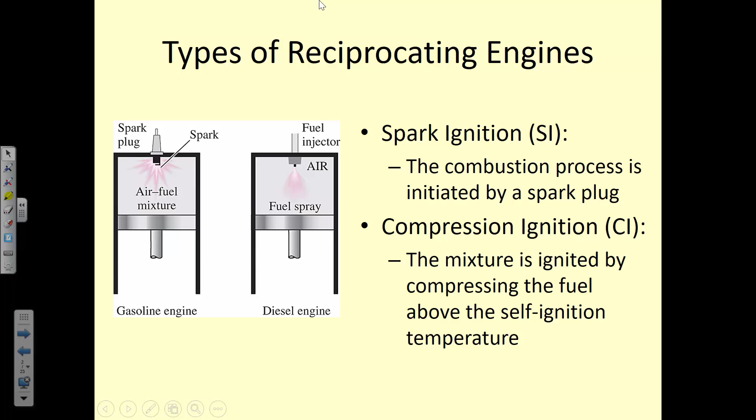So internal combustion engines - that's the primary methodology of work output, and there are 2 different ways it's delivered. There are actually many different ones in between, and we'll talk about that later in the lesson, but if we're categorizing them, it's spark ignition and compression ignition.

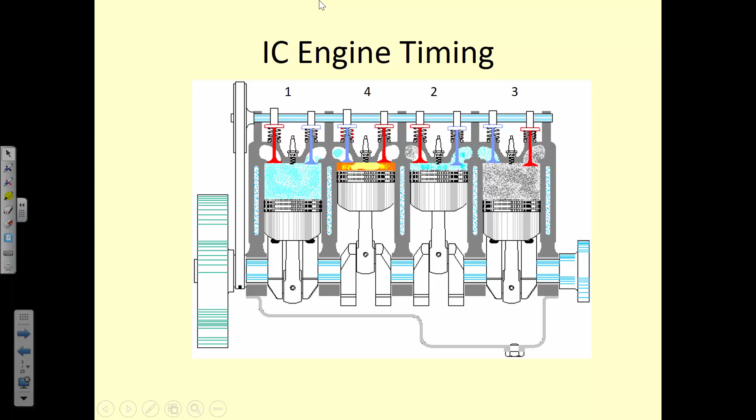So the diesel cycle is very similar to the Otto cycle or the gas cycle in that it consists of 4 strokes. We have a compression stroke where air in our cylinder is compressed. Then there's the power stroke where the fuel's injected and it self-ignites and forces that piston down, so that's what gives us our power output. The exhaust stroke where the piston moves back up and these byproducts of combustion are exhausted, and the intake stroke where it moves down and it intakes fresh air again, and then the process repeats all over again.

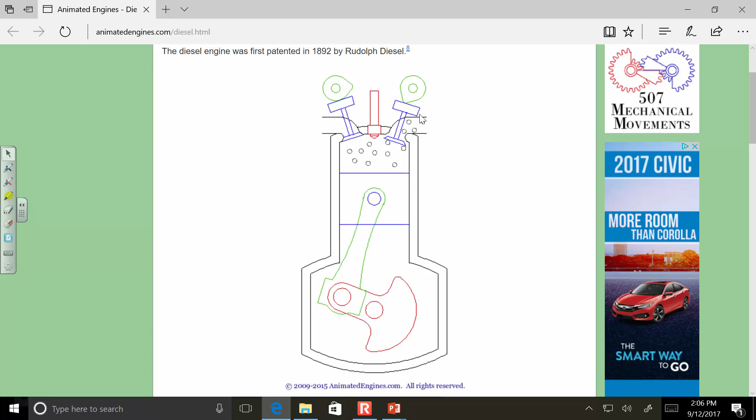So we can look at it in another view in this software, and I like it because I can slow it down so we can see each of these strokes as they are. So that's exhaust, we have intake, compression, and then it sprays the fuel in there, it self-ignites, forces the piston down, and then we exhaust the byproducts again. So the process is very similar to that of the gas engine, but you'll see as we look at the property diagrams that it's actually a slightly different process as it's drawn on the PV diagram.

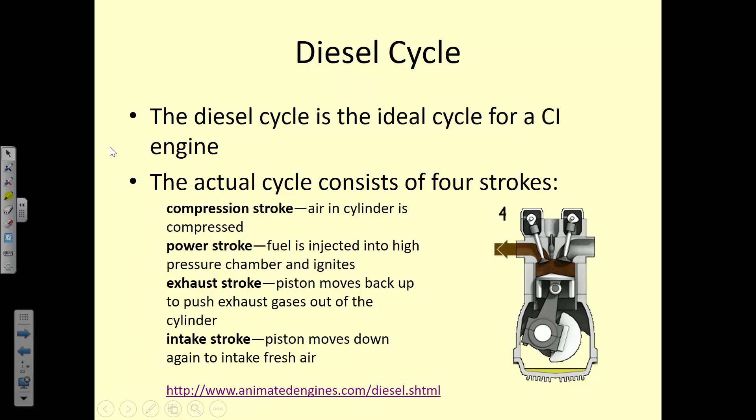So rather than having a constant volume process, we have a constant pressure process from 2 to 3. This is the PV and TS diagrams for the diesel cycle, and again, this is an idealized cycle. If you look from state 1 to state 2, it's an isentropic process, meaning entropy is constant, so it's a reversible process. The same from state 3 to state 4, it's a reversible process, entropy is constant. So these isentropic processes from 1 to 2 are shown here on a PV diagram as such. And you note from 2 to 3, we have constant pressure, but from 4 to 1, we have a constant volume process.

So this is just an idealized model of the actual piston cylinder device. It's very difficult in practice to have a constant volume piece of a compression process, but that's how we exhaust the gases. We're imagining that there's a Q out at a constant volume process, even though in reality that piston is moving up in order to exhaust out the gases. But again, this is just the model and it closely approximates the real life cycle.

So if we want to look at our Q in, we have H3 minus H2, but Q out is U4 minus U1. Can anybody tell me or hypothesize why, when we're looking at Q in, we have enthalpy terms, but for Q out, we have just internal energy terms?

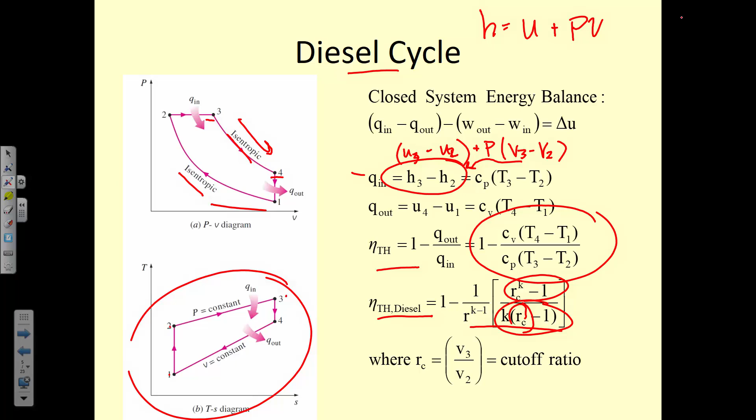Another thing to do is to decrease the cutoff ratio. If we decrease it to the point where it is 1, going back to this equation, the bottom part kind of explodes, and this goes to 0. So we get 0 over 0, and that term goes away. You can prove it mathematically, but we're not going to go through that process today. So for a cutoff ratio of 1, we'll have the same thermal efficiency as the Otto cycle.

So let's look at them again. If we compare those thermal efficiencies, for the same compression ratio, the Otto cycle is going to have a higher thermal efficiency. Okay, so why do we get better gas mileage out of diesel vehicles if Otto or gasoline engines are more efficient?

Energy content of the fuel, that's part of it, because we can change the K values of the diesel engine. But the bigger issue is that we can just continue to increase the compression ratio. So even though the diesel engines are less efficient, we can operate at much higher compression ratios. So for the same compression ratio, a gas engine will have greater efficiency. But for higher compression ratios, the diesel engines perform better. Okay, so that's an advantage there.

And then again, where the cutoff ratio goes to 1, the efficiencies of the Otto cycle and the diesel cycle will be the same.

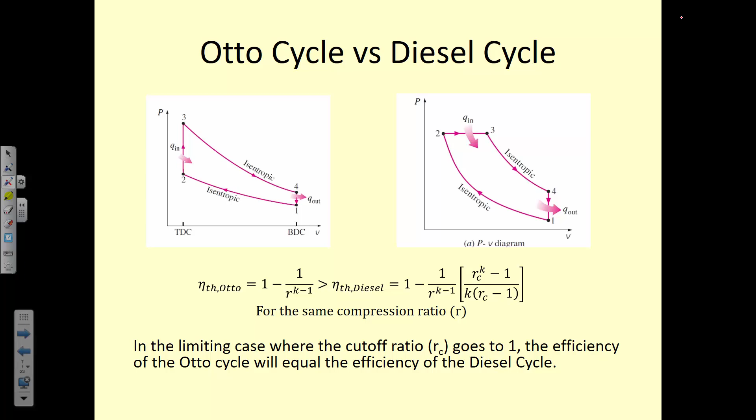So in general, we can operate diesel engines at a higher compression ratio because it's compression ignition. We cannot do that with spark ignition vehicles because the fuel will self-ignite, and that's kind of a problem. Diesel engines also usually operate at a lower RPM than gas engines, which is nice because we get greater torque out of the engine.

So this is used for trucks, for ships, for trains. Most of those large, slow-moving, high-power vehicles or transportation systems operate with diesel engines. And they have higher stoichiometric ratios, which means there's a greater air content mixed with the fuel, so it's a cleaner burn.

So diesel engines actually burn cleaner most often, more times than gas engines, unless it's Volkswagen and you're fudging your numbers for emissions. But that's recent. That's only recent, yeah.

So there are great advantages to moving to diesel. In the U.S., diesel happens to be more expensive than gas, but in a lot of the countries outside the U.S., diesel is still cheaper. It used to be cheaper, but I think the tax on it in the U.S. is so much higher than it is in some of the other countries, so it's more expensive to purchase diesel, even if you get greater fuel content.

Yes. So you said that the diesel is cleaner burning. You know how diesel trucks have the emissions? Well, they have emissions, like they take the exhaust and recycle it. Yeah. Why do they recycle it if it's burning cleaner? Well, they probably aren't operating with a high air-to-fuel mix.

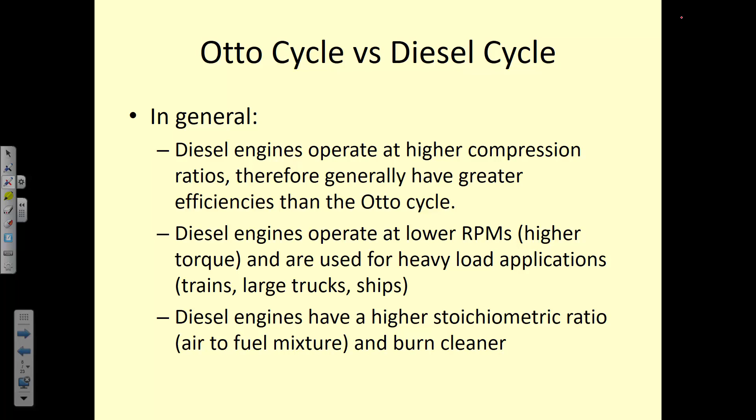So it has the potential to be cleaner burning. And there are diesel cars that get like 90 to 100 miles per gallon. We don't, I think, have any in the US. Motorcycles? Well, that's a two-stroke engine, so that's a different issue altogether, but yeah, it's something to think about in engineering design.

So let's do an example with a diesel engine, and I'm going to see if I can get this pen to not freak out on me. So we have an air standard diesel cycle—air standard, what does that mean? What does that tell us?

We follow the assumptions of the air standard cycle, meaning that even though it's an air-fuel mixture, we're going to assume air is our working fluid at room temperature, that it's in a continuous loop, and we can assume constant specific heats in some cases, but in this problem we have to assume variable specific heats.

The diesel cycle has a compression ratio of 18.2. Air is at 120 Fahrenheit and 14.7 psia at the beginning of the compression process, and 3200 Rankine at the end of the heat addition process. Accounting for the variation of specific heats with temperature means you have to use your tables. Determine the cutoff ratio, the heat rejection per unit mass, and the thermal efficiency.

Let's set up this problem and figure out what it's indicating. At the beginning of the compression process, air is at 120 Fahrenheit and 14.7 psia. What is the beginning of the compression process? Not 3, that would be expansion, since volume is increasing. So it's state 1. Sometimes when you read these problems, you have to read into them because they're not going to necessarily say 'at state 1' — it may say 'at the beginning of the compression process' or 'at the end of the compression process,' so you have to know what that means. We're at 120 degrees Fahrenheit and 14.7 psia at state 1.

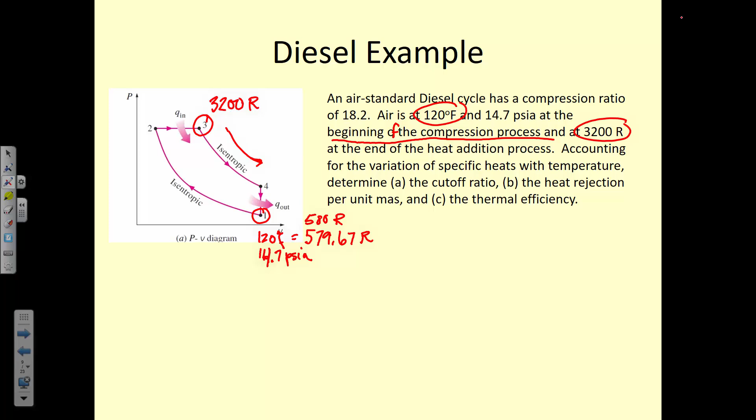We don't know either of those things. Part B, the heat rejection per unit mass — there's a lot of typos in this, who wrote this? Okay, so heat rejection — is that Q in or Q out? Q out. And how would we rewrite Q out? U4 minus U1.

Heat rejection per unit mass. And part C, the thermal efficiency. The thermal efficiency is equal to work out over Q in, or 1 minus Q out over Q in.

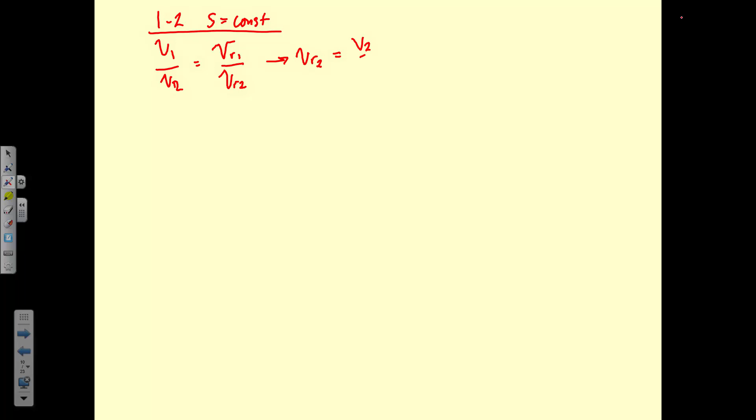So V1 over V2 is equal to VR1 over VR2. So we can solve for VR2, which is equal to V2 over V1 times VR1. And this V2 over V1 is the inverse of the compression ratio, V1 over V2. So that's 1 over 18.2 multiplied by VR1.

And I guess I should write these down over here. So state 1, we have T is 120 degrees Fahrenheit, is 579.67 Rankine. And then we look up our VR1, is 120.88, and I looked up internal energy at 1 because I'll need that later, is 98.84 BTUs per pound mass.

Okay, so we plug in this VR1, we get 120.88 divided by 18.2. We find that our VR2 is 6.64. So let's write down state 2.

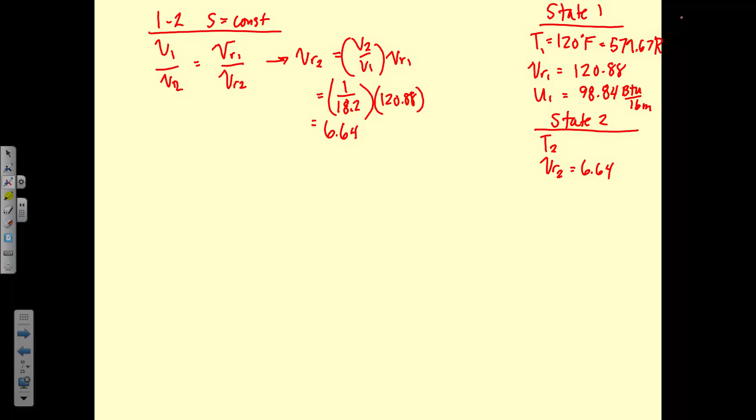We found VR2 is 6.64. So then we go back to table A17 and we look into this column to figure out where VR is equal to 6.64. And it looks like it occurs between 1520 and 1540 Rankine. Oh no, sorry, I'm on the wrong table, A17E. So 6.64 occurs between 1700 and 1750 Rankine. Okay, so if we interpolate, which we've already done...

We find that our temperature 2 is equal to 1725 Rankine. And then while I'm there, I'm just going to look up U2 and H2 as 311.12 BTUs per pound mass. Oh, stupid units. Okay. And then 429.56 BTUs per pound mass.

So you find the T2 based off of what? VR2. So, yeah, if you look on the table, it occurs between 1700 and 1750 Rankine. So we find where VR2 is equal to 6.64, we interpolate between those two lines on the table to back out the temperature. So that's how we find the second state for an ideal gas, when we know the ratio of volumes.

1725 is an interpolated value? Yeah, it's just not halfway between? Well, it ends up being halfway between. Yeah, I'm just saying, you just don't assume it's halfway. No, you don't just assume halfway. Yeah, I actually interpolated it, and that's the value that it came out to be, because 6.64 is in between 6.35 and 6.92. Okay.

Okay, so we have determined our properties at state 2, and then process 2 to 3 is a constant pressure process. So for a closed cycle with the same mass, M2 equals M3, or in other words, P3V3 over T3 is equal to P2V2 over T2. Because P3 is equal to P2, we can cancel those out of the equation. And we find that V3 over V2, or in other words the cutoff ratio, is equal to the ratio of temperatures T3 over T2. We were given T3 initially, so I might as well write that one down, state 3.

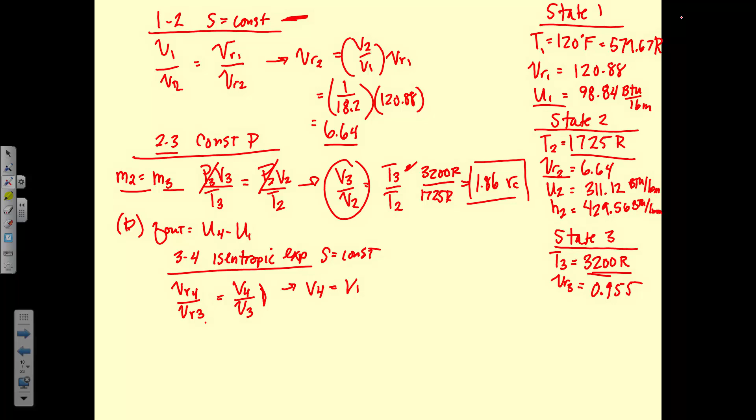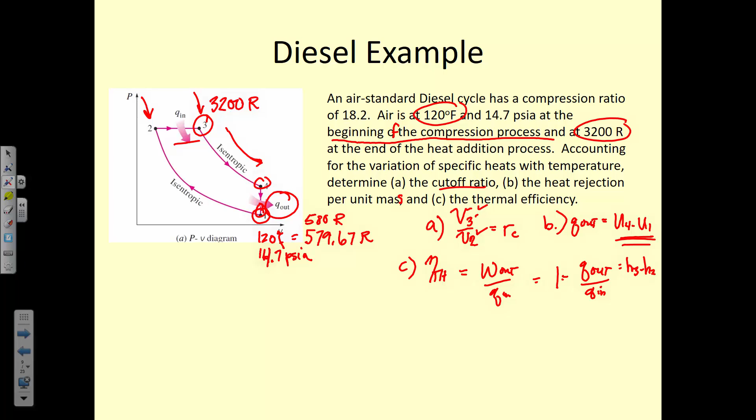Okay, so again we have these ratios. But this time it's a little tricky because V4 over V3 is not a known ratio. It's not the compression ratio, it's not the cutoff ratio. But we know that V4 is the same volume as V1 for a diesel cycle. So if we look back at our picture, V4 and V1 are the same volume, then we know that V3 is equal to 1.86 times V2. So we can plug those two in there. VR4 is equal to V1 over 1.86 V2 multiplied by VR3. So now we see something familiar, this V1 over V2, which is our compression ratio. So we can rewrite this, that VR4 is equal to VR3 times R over RC, or this 1.86.

So we find the values for that: 0.955 multiplied by 18.2 over 1.86. So we find 9.345 for state 4.

Okay, so we don't know T4, we do know VR4 is 9.345. So we go back to the table and look up to figure out where T equals this value that gives us a VR of 9.345, and we find that T4 is 1533.55 Rankine. While we're there, we're also going to look up U4, which is 272.93 BTUs per pound mass.

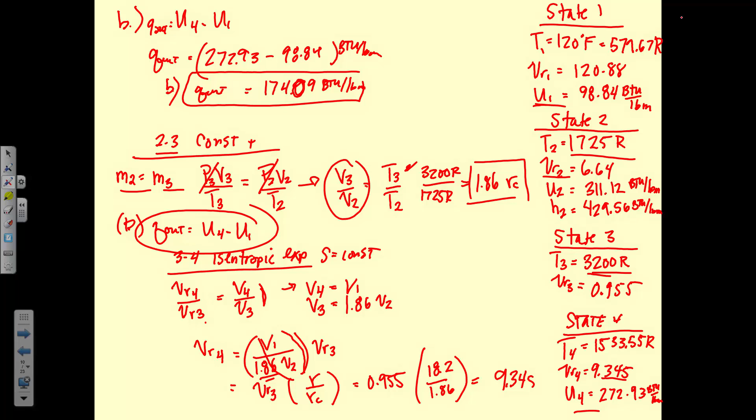So for part C now, we're trying to find the thermal efficiency, which is equal to 1 minus Q out over Q in. We know Q out, Q in is equal to H3 minus H2. So H3 is specified, we can look that one up, and we find it to be 849.48 BTUs per pound mass. So we can plug in the numbers for that, and we find that Q in is equal to 419.92 BTUs per pound mass. So our thermal efficiency, 1 minus Q out over Q in, plug in the numbers, and we get 0.585 or 58.5%.

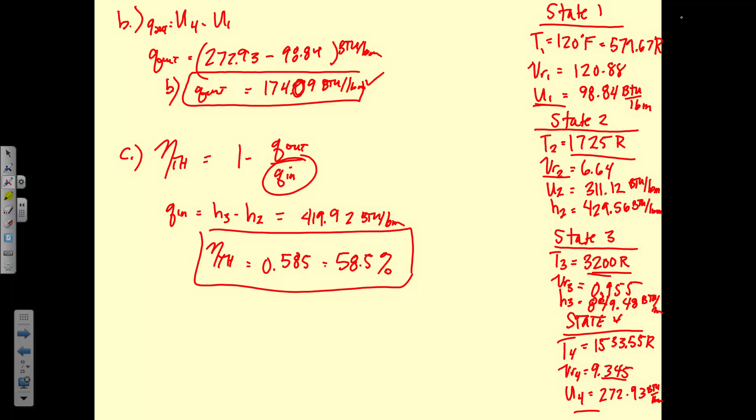So you can see how there's several steps involved just in finding the property values of these problems. If you know the cutoff ratio or you know the compression ratio, then you know the ratios of the volumes, so we never explicitly solve for specific volume in this problem. We just use the ratios. So you don't have to necessarily solve for specific volume. If you know the ratios, then you can find a state that's a parallel or concurrent state. Any questions on this example? This one's very similar to your homework. Hopefully you understood it and can follow along.

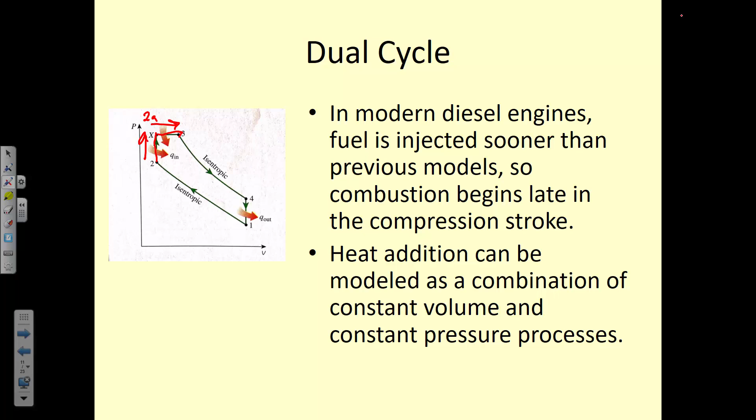There are some diesel engines where the fuel is injected sooner than previous models, so combustion begins while it's still being compressed. We look at it as a combination of a constant volume and a constant pressure process, so the heat addition has to be modeled slightly differently. This is perhaps more accurate when looking at some higher performance diesel engines, but we don't necessarily need to do the analysis of that. You would have to look at it from state 1 to 2, then we call this state 2A, because from 2 to 2A and 2A to 3 is not a straight line. It bends that corner if we wanted to do the analysis.

There's a lot of interesting stuff, and this was actually sent to me, the Mazda Skyactiv X, which is kind of like they're trying to find a hybrid between a gas and a diesel engine. Mazda's been working on these Skyactiv engines, so they have a Skyactiv G and a Skyactiv D, their gas and diesel engines respectively. They've been playing around with parameters that allow for greater thermal efficiency, changing compression ratios, specific heat ratios, how long combustion happens, the timing of combustion, heat transfer within the cylinder to the cylinder walls, pressure differentials between inlet and exhaust, and mechanical friction. Their goal is to turn all of these boxes green. By getting closer to a reversible or ideal state, they're able to improve efficiency, get higher performance, greater fuel economy, and it's an interesting process.

So what they're doing with these new diesel engines is they have a very lean air-to-fuel mixture, and a slight delay in igniting the fuel. It's almost like a spark ignition, compression ignition mixture, because they're sparking to ignite this little ball of gas that's not gasoline, not diesel. It's sometimes argon or some other gas. They try to ignite this little ball, which creates a little fire, and then the fire ignites everything else.

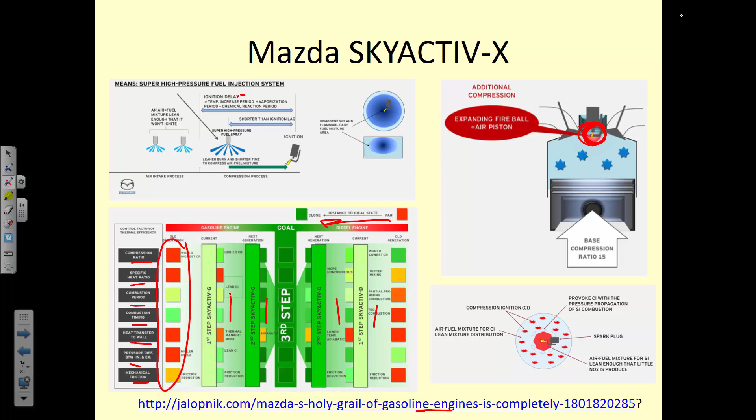Some of the disadvantage of waiting for the piston to be fully up before you have your compression ignition occur is that, yes, your power stroke is longer, but it's not as easy to time as when you have spark ignition. So there are some variables they're playing with for the combustion period and power stroke length. By allowing a compression ignition plus a spark ignition, you kind of get the best of both worlds. It's pretty interesting if you want to go look at it.

And then there's some we looked at a little last semester. Like a Wankel engine, it's not a 2-stroke or 4-stroke, it's some kind of circular stroke where the intake and exhaust are similar to a 2-stroke engine, where the device that's moving, I don't necessarily want to call it a piston, it's more like a can, is covering and uncovering the intake and exhaust. So it's kind of interesting.

They have a lot of reliability issues with it, as you can imagine, for something that's an off-centered rotation, but any slight irregularity causes significant vibration, and then it vibrates itself apart.

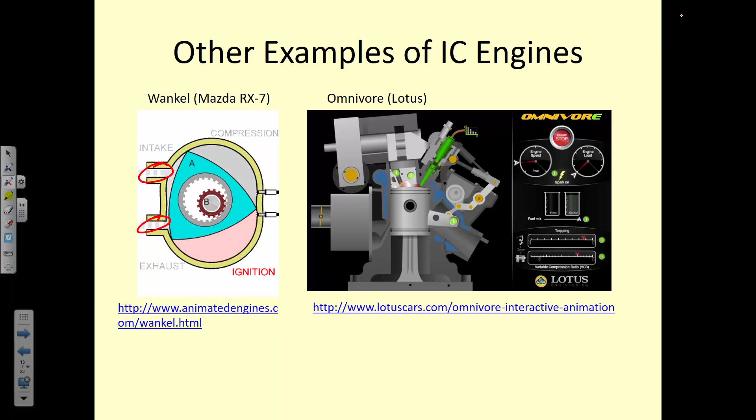And then there's the omnivore engine, another concept engine where you can change the amount of your ethanol and gasoline mixture, change your air-fuel mixture, change the size of the cylinders so that you can have a higher compression ratio temporarily. This was developed by Lotus, and I'm not certain if they have actual working prototypes or not, but it's another interesting idea to think about to improve the efficiency and performance of an engine.

And then there are hybrid engines. The Prius, for example, is a hybrid where they have a gas engine as well as an electric motor. So the Prius can receive its power from the electric motor, or from the gas engine, or it can have the gas engine charging the electric motor, or it can have both of them on simultaneously when it needs more power.

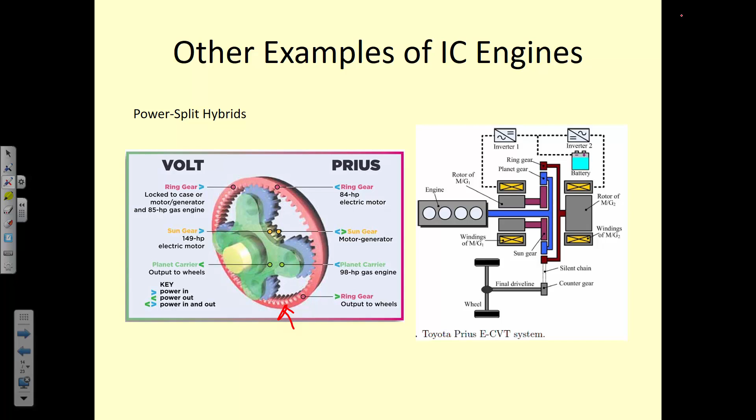And so it uses this planetary gear system because it allows gears that were inputs to then become outputs, depending on which direction you want the energy transferred. So it's completely different than the transference of power you'd see in a typical engine piston with crankshafts attached to other things, because you have the electric motor directly driving the wheels at times, and other times the engine is driving it.

Okay, so that's the end of our discussion on the diesel cycle.

We're now going to talk about Stirling and Ericsson. These are two cycles that are totally reversible, so just like the Carnot cycle, they're idealized, very idealized models that are difficult to achieve in practice with real machines. But because it's a reversible model, it's another thing we can study and see how we can approximate it and try to get there so that we get better efficiencies.

So from state 1 to 2 is an isothermal expansion, a constant temperature expansion process where we have some heat input. Then from 2 to 3 is a constant volume, or isometric, regeneration process, so the volume is constant, and as we're expanding, we're removing some heat from this fluid and transferring it to the fluid on the opposite side of the cycle. Then from 3 to 4 is a constant temperature, isothermal compression, and from 4 to 1 is again an isometric regeneration process, where now we're receiving some heat from the fluid on the other side in order to preheat our gas as it's going into this portion of the cycle.

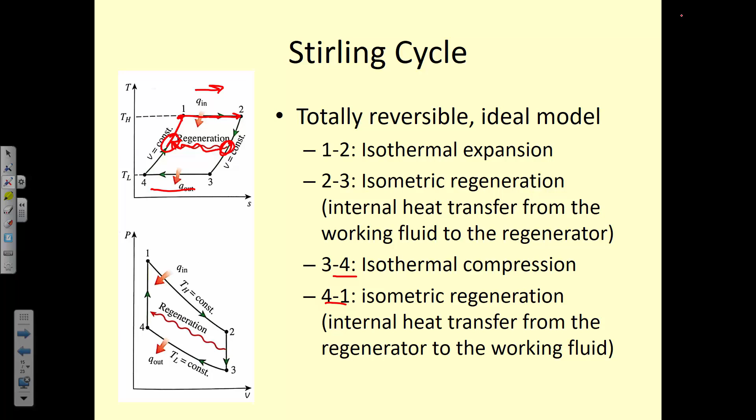As we're cooling something down, if we can remove some of that heat and use it to preheat a fluid on the other side of our system, that's a positive use of the energy rather than just depositing it into the environment. We can't use it to completely heat our fluid, but we can use it to get a preheat, and they often do employ that in industry.

So let's work through an example of the Stirling cycle, because I think it's a little bit more informative and helps us understand the components of it and how to analyze it.

We have an ideal Stirling cycle using helium as the working fluid, and it operates between the temperature limits of 300 and 2000 Kelvin, and the pressure limits of 150 kilopascals and 3 megapascals. If we draw that on this diagram, our T sub L is 300, our T sub H is 2000, and then our high pressure would be here at state 1 of 3 megapascals, and our low pressure would be here at state 3 of 150 kilopascals.

This is another example of reading the problem and knowing and understanding where those values are assigned in our cycle - our pressure limits and our temperature limits. It's not P1 and P2, it's P1 and P3, so we have to know that.

Assuming the mass of the helium in the cycle is 0.12 kilograms, determine the thermal efficiency, the amount of heat transfer in the regenerator, and the work output per cycle.

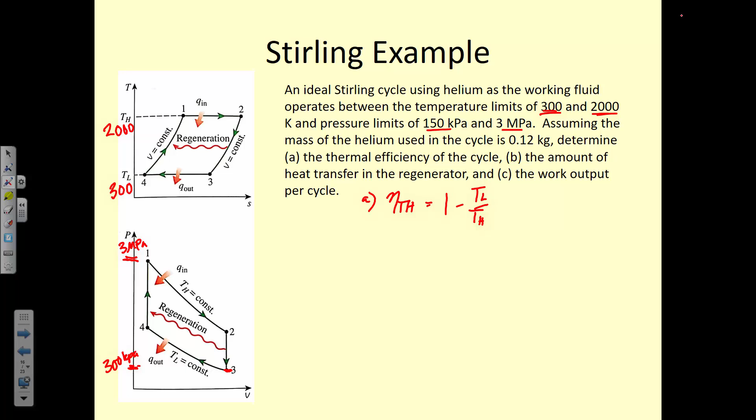Because this is a totally reversible cycle, the thermal efficiency is equal to 1 minus T sub L over T sub H. Because of the Carnot principle - one principle is that the Carnot cycle, or a reversible cycle, will have the greatest thermal efficiency of any device. The second Carnot principle is that any reversible device operating between the same two temperature limits will have the same efficiency. So even though this is not operating on the Carnot cycle, because it's also a totally reversible device, at best it will have the same efficiency as the Carnot cycle.

Any totally reversible device will have the same efficiency between the same two temperature limits. So even though it's not Carnot, it still has the same efficiency: 1 minus T sub L over T sub H. That's pretty easy - we're already given our temperatures in terms of Kelvin. So it's 1 minus 300 Kelvin over 2,000 Kelvin, which gives us an efficiency of 85%.

Part B, the amount of heat transfer in the regenerator. This regeneration process happens between 2 to 3. So we have some heat out, Q out from 2 to 3, which will be equal to Q in from 4 to 1.

If we want to calculate the heat in or the heat out for either one of those processes, we're assuming constant specific heats with helium - assume constant C sub P, C sub V, because it didn't tell us to do otherwise. So our Q in is equal to C sub V times T1 minus T4. We're given already T1 and T4. C sub V for helium is 3.1156 kilojoules per kilogram Kelvin.

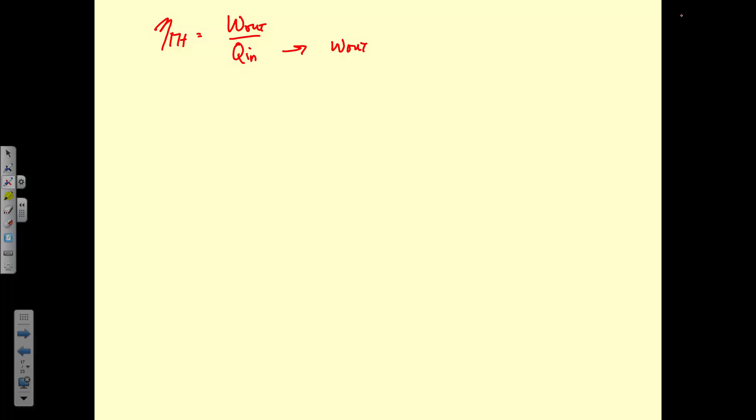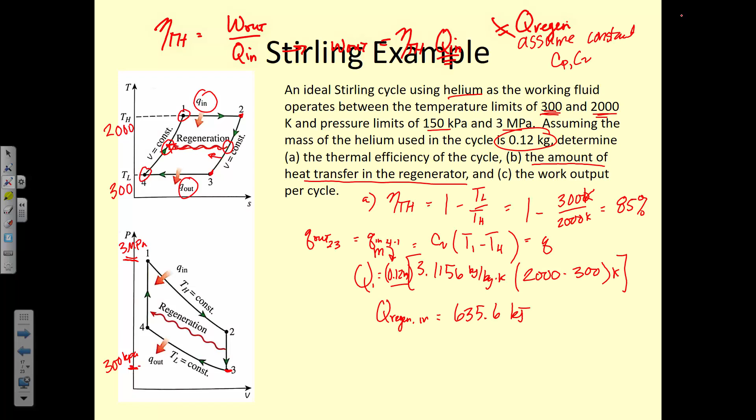Okay, so then our thermal efficiency is equal to work out over Q in. So our work out is equal to the thermal efficiency, which we solved for earlier, multiplied by Q in. And again, this Q in is not the same as the Q regenerate. It's a different Q in because it's the area under the curve on a TS diagram from state 1 to state 2.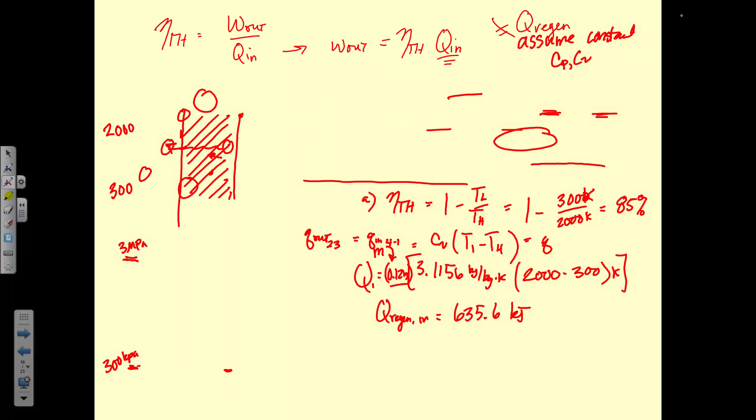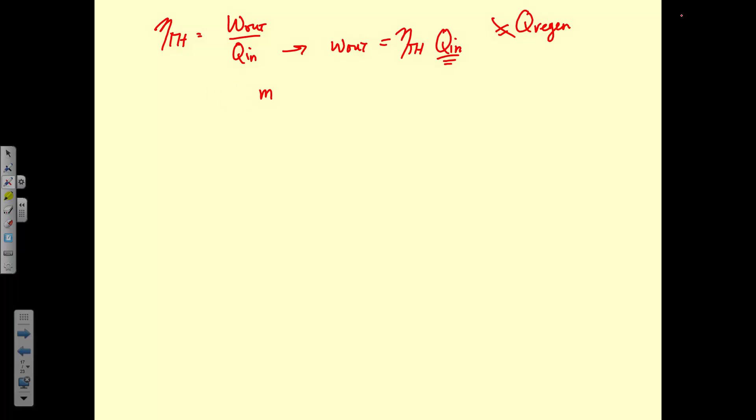Okay, so we want to find Q in, it's going to be this area, which fortunately for us is a rectangle, so we can calculate it algebraically. So Q in is going to be the mass times the high temperature times S2 minus S1.

Okay, so now we have helium, which is an ideal gas. We have entropy that we're supposed to calculate. We don't have a table that gives us entropy in helium, but we do have some equations called the Gibbs equations, which allow us to calculate that. So S2 minus S1 is equal to C sub V, natural log of T2 over T1, plus R, natural log of V2 over V1.

So again, this comes from the Gibbs equations. I don't know if this is first or second. I think it's the first. That doesn't really matter. Okay, so T2 is equal to what?

Let's look back at our picture. TH. What's T1? Also TH. What's the natural log of 1? 0. So this part goes to 0. So we just have our natural log of V2 over V1. Okay, do we know V2 over V1?

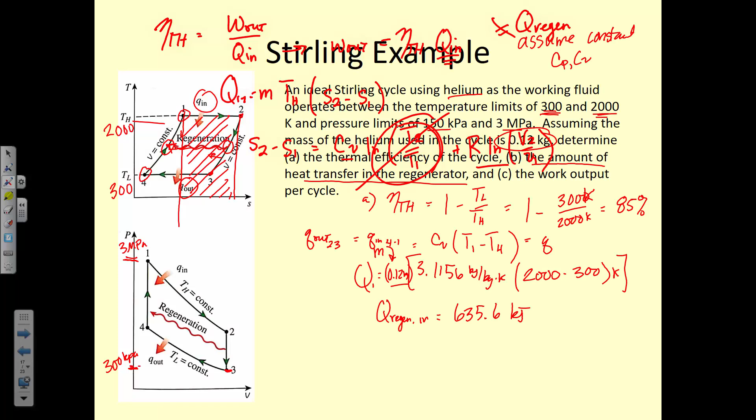Do we have a compression ratio for this problem? No, we have this V2 here, which will be that value, V1 here, which will be some value. We know that V1 is the same as V4, and that V2 is the same as V3, but we don't know V2 over V1. Okay, so that's a minor hiccup, but we know that V2 is the same as V3, so it's equal to V3 over V1.

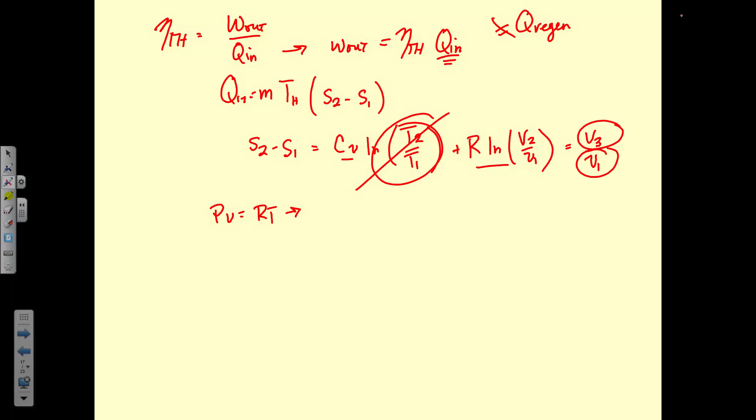Okay, so then from the ideal gas law, PV equals RT, we can rewrite this. V3 is equal to RT3 over P3, and V1 is equal to RT1 over P1. So we get rid of the R, that cancels out. We have P1 T3 over P3 T1. Okay, because we know P1 and P3.

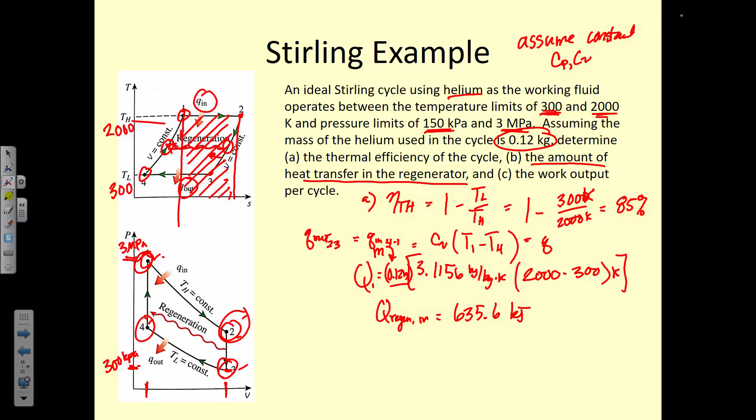So if we look back to this picture, the pressure is given as 150 and 3 megapascals. That's P1 and P3. We don't know P2, we don't know P4. Turns out we don't need them because we know the ratio is the same between V2 over V1 or V3 over V1. So that's the reason that we did that substitution, to have it in terms of T3 and T1 instead of V2 and V1.

So if we put in the numbers and solve for that, we have S2 minus S1 is equal to R, natural log of P1 T3 over P3 T1, and we get that as equal to 2.28 kilojoules per kilogram Kelvin.

So then Q in is equal to M times TH times S2 minus S1. So it's equal to 0.12 kilograms multiplied by 2000 Kelvin times 2.28 kilojoules per kilogram Kelvin. So Q in is equal to 547.2 kilojoules. What we're actually trying to solve is work out, if you remember, the thermal efficiency times Q in.

So we have 0.85 multiplied by this 547.2 kilojoules, gives us 465.12 kilojoules.

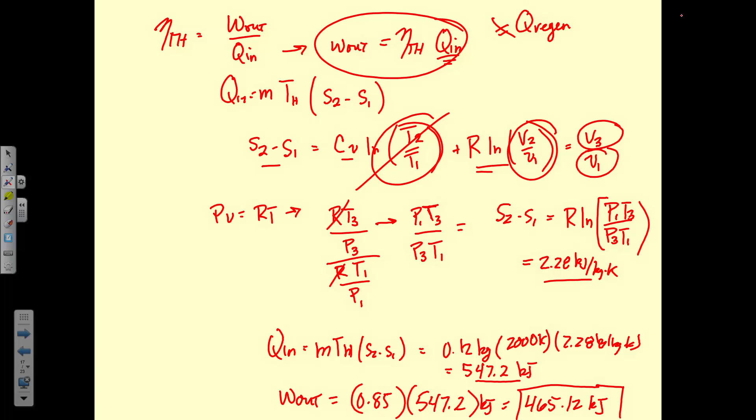Okay, so the trickiest part of these problems is when you have volume ratios and you have to finesse it in order to find a ratio that you know and substitute it in for the one that you don't know. Or maybe have it in terms of temperature instead of volumes. So sometimes you have to play around with it. You have to look at what you're given in the problem, what you actually know, and then try to find some of these other things.

Okay, so regeneration, both the Stirling and the Ericsson cycles utilize this regeneration, and so we transfer heat from one component of the process, sometimes to a thermal storage device, and then that acts as a heat exchanger as the fluid is coming through from the other part of the process.

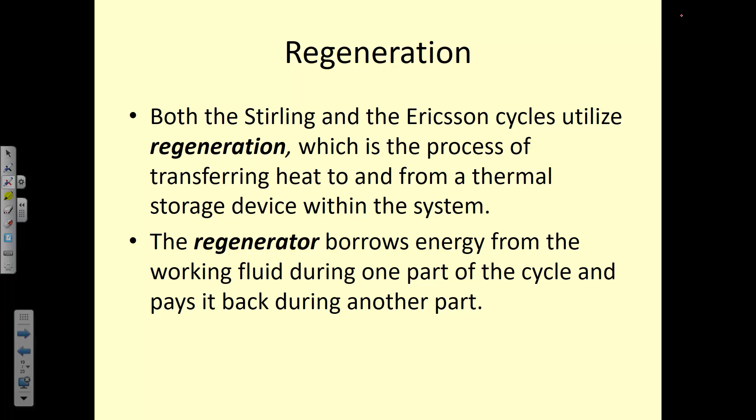So it's borrowing energy from one place and using it in another part of the process. Regeneration serves to increase overall efficiency because it's not free energy coming from nowhere, but energy that would otherwise be expended that we're recycling and reusing within our process to help heat things up. Okay, so it only works when you're trying to heat something up. You can't use regeneration to get a greater work output directly. It's meant to just preheat things or add heat.

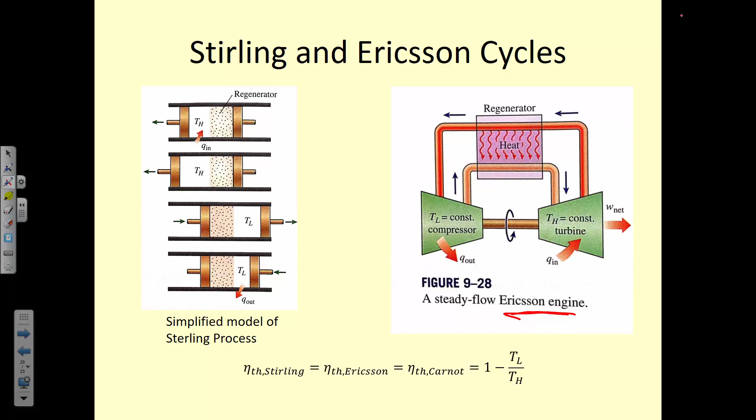Let's do an example with the Ericsson cycle now, using similar analysis and methodology as we've used thus far for the gas power cycles, relying upon our knowledge of entropy equations for ideal gas and how to make these ratios work in our favor.

We have an ideal Ericsson cycle with air as the working fluid in a steady flow system. Air is at 27 Celsius and 120 kilopascals at the beginning of the isothermal compression process, during which 150 kilojoules per kilogram of heat is rejected. Heat transfer to the air occurs at 1200 K. Determine the max pressure, the net work output, and the thermal efficiency.

Okay, so again, let's try to define what's happening. What is the beginning of the isothermal compression process? What state is that?

State 3. So from 3 to 4 is isothermal compression. And how do you know it's compression? You know it's either 3 to 4 or 1 to 2. In this case, if we look at our PV diagram, 3 is a higher volume than 4, so we know that's compression - state 3 to 4 is isothermal compression. The beginning of the isothermal compression process would be state 3, so it's 27 Celsius and 120 kilopascals at state 3.

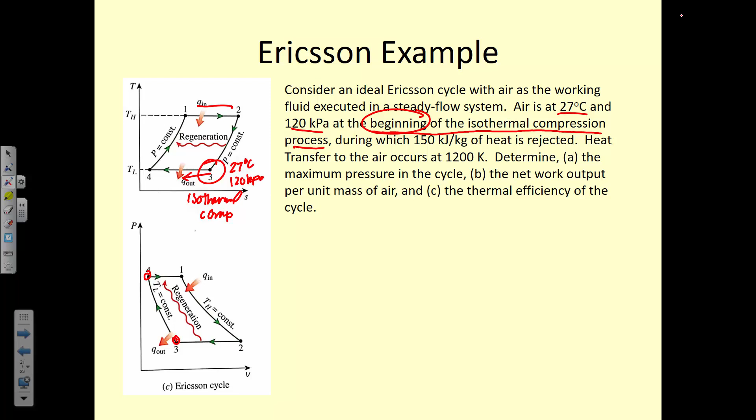During which 150 kilojoules per kilogram of heat is rejected, so our Q out is 150 kilojoules per kilogram. Then heat transfer to the air occurs at 1200 K - so what is that talking about?

Just the regeneration part? It is not the regeneration part - that was a good guess. The temperature at which compression takes place? Heat transfer to the air occurs at 1200 Kelvin - is that Q? When are we having a Q in? Between 1 and 2. So this T sub H is equal to 1200 Kelvin. We kind of know that it's this Q in they're talking about and not the regeneration process, because it's talking about heat transfer and not regeneration. Generally, if they're talking about heat transfer during the regeneration process, they explicitly say that. So if they're just saying heat is transferred in, then...

So determine the max pressure in the cycle, the net work output per unit mass, and the thermal efficiency. Where is the maximum pressure going to occur? This is going to be Pmax, and it will be either P4 or P1. One of those may be easier to find than the other.

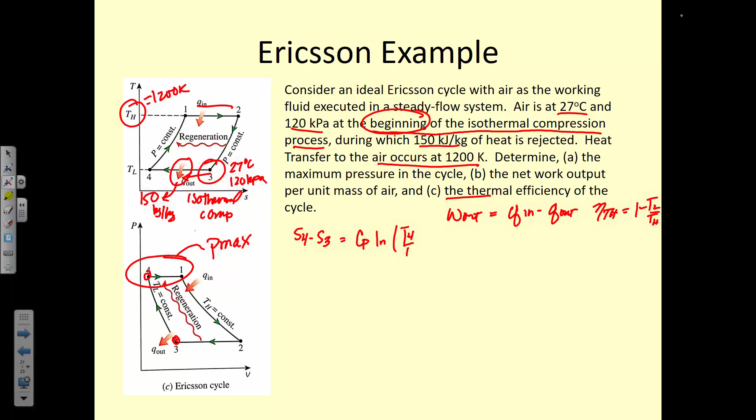Okay, so let's start plugging through it. We know that we need to find the max pressure, and it's either in state 1 or state 4. Let's just go ahead and look at state 4. So this is kind of a roundabout way of getting pressure, but we know that S4 minus S3 is equal to C sub P natural log of T4 over T3 - this is the second Gibbs equation - minus R natural log of P4 over P3. We now have P4 in our equation, and we already know P3, so that's a good thing. T4 and T3 are the same temperature, so that term goes away, because natural log of 1 equals 0. So we have S4 minus S3 is equal to minus R natural log of P4 over P3. So P4 is an unknown, but so are S4 and S3.

We also know on a TS diagram that the area under the curve is the heat transfer. So Q out is equal to T naught times S4 minus S3. And this is actually negative Q out equals T naught times S4 minus S3. So we can rearrange this in terms of S4 minus S3 equals negative Q out over T naught.

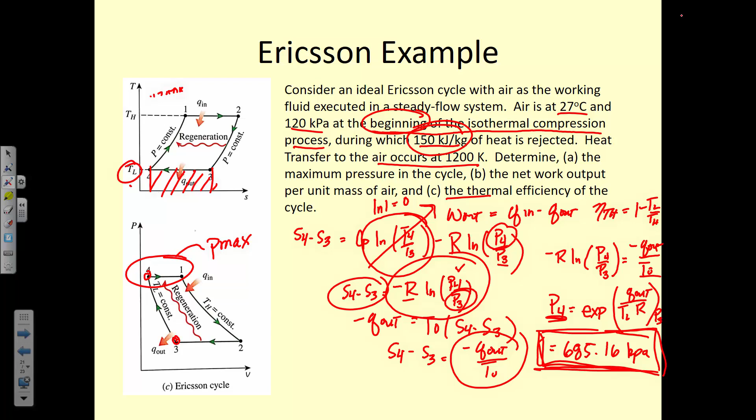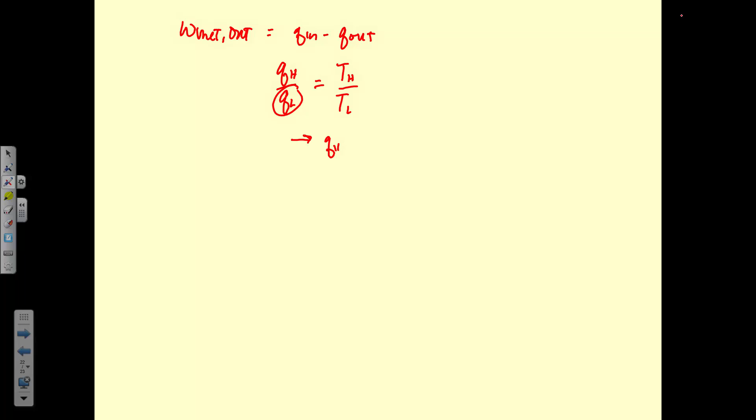Okay, so part B, work net out is equal to Q in minus Q out. And we know that for reversible cycles, Q sub H over Q sub L is equal to T sub H over T sub L. So in this problem we're given Q sub L, but we don't know Q sub H. So we can solve for Q sub H, equal to T sub H over T sub L times Q sub L. If we plug in the numbers, 1200 Kelvin over 300 Kelvin multiplied by 150 kilojoules per kilogram, we get 600 kilojoules per kilogram.

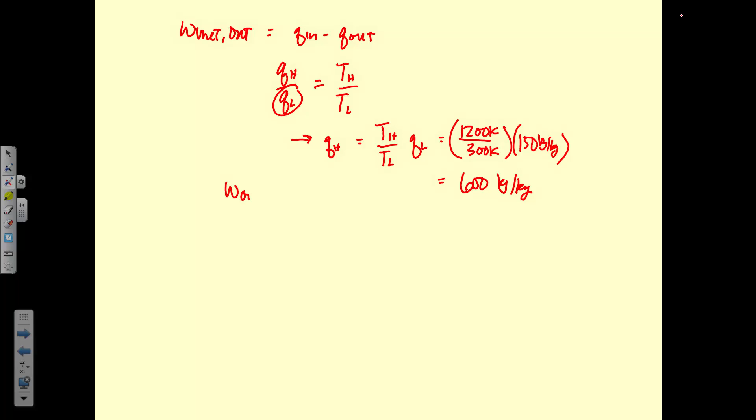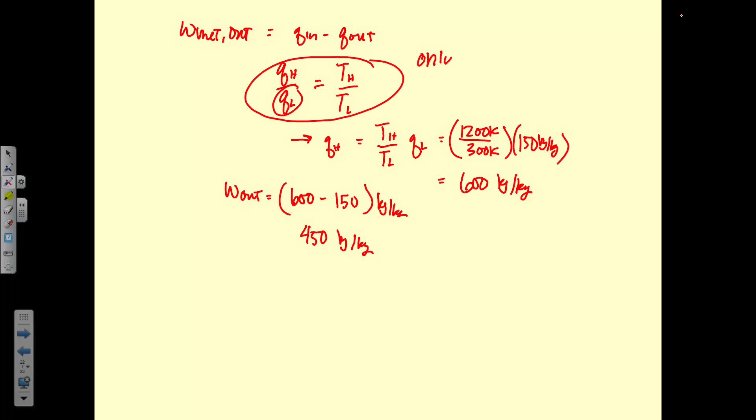So work out is equal to 600 minus 150 kilojoules per kilogram, which is 450 kilojoules per kilogram. And this is only valid for reversible systems. So for the Stirling cycle, the Ericsson cycle, the Carnot cycle—it's not valid for the Otto cycle or the diesel cycle.

Okay, so then the last one, thermal efficiency is equal to 1 minus T sub L over T sub H. Plug in the numbers for that, we get 75%. So 300 Kelvin over 1200 Kelvin.

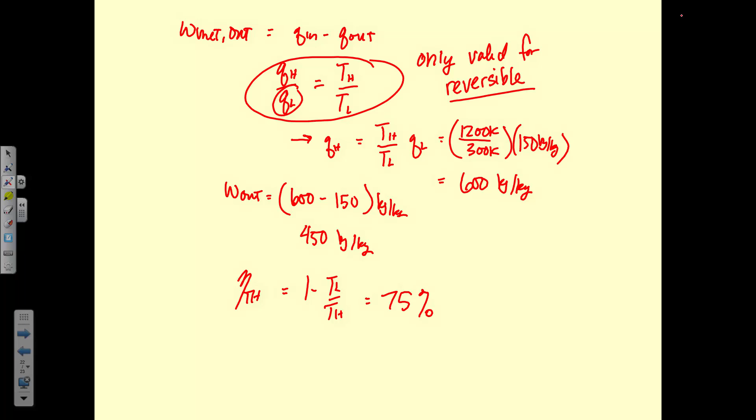Okay, so get started on your homework early, because there's a lot of that stuff, the tricks, the manipulations that maybe you just need. Okay, so just some last additional notes about the cycles.

Stirling and Ericsson are both difficult to implement in practice, though there have been some Stirling engines. They're both considered external combustion, meaning that rather than having some internal combustion process that delivers our power stroke, we're receiving heat from an external source and using that to drive our cycle. The advantage of this is that we can use a variety of different fuels. So Stirling and Ericsson cycles are not dependent on any one specific type of fuel, but it does take more time—it allows more time for complete combustion, so when you're burning these fuels externally just to generate heat, you can burn them completely. You're not just worried about the timing of the device and trying to get that combustion just right.

And then regeneration, as we'll see next period, increases efficiency. So it's a great way to improve the efficiency of our cycles without having to redesign everything about our turbines and things like that.